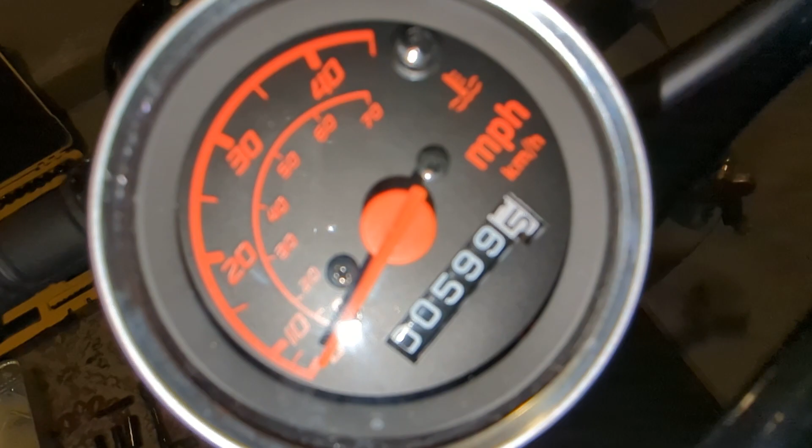I have hit almost 600 miles, it's 599.5. By the time I get ready to go to work tomorrow and come back, it will be well over 600. In case you guys aren't tracking, we have to do the very first service maintenance on these bikes at right around 600 miles.

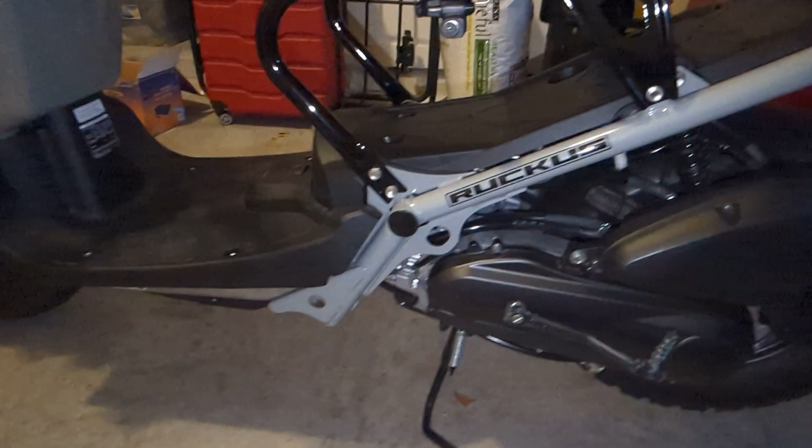After that, you have to do it every 2,500 miles. But I'm part of some Facebook groups for the Ruckus, and lately I saw a guy out there with a 22,000 mile Ruckus from like 2005, and he said what he did is an oil change every 1,000 miles. So that's something to keep in mind.

As of right now, I will do my 600-mile service real quick, and after that I might not wait until 2,500 miles. Maybe I'll just do 1,500 or something. But definitely something to keep in mind.

You know, it's a Honda. If you take care of it, it will last forever, and that's a for sure thing on these things.

So I know there's a 600-mile service. What do I do? Well, I check the manual, right? So that's the very first thing you guys will need to check. Check your manual. Some things we're gonna need today, real quick.

We're gonna need a half-inch ratchet, small extension if you want to. You might actually need it for the oil. I need a 17 socket, a 12, and a 10 mil.

As well, I did buy the genuine Honda oil. I didn't really have to. All you have to do is get a 4-stroke 10W30 oil for anything, but it's so cheap. I actually got a 2-pack from Amazon, it was really cheap, so I'm just gonna get the original, no big deal.

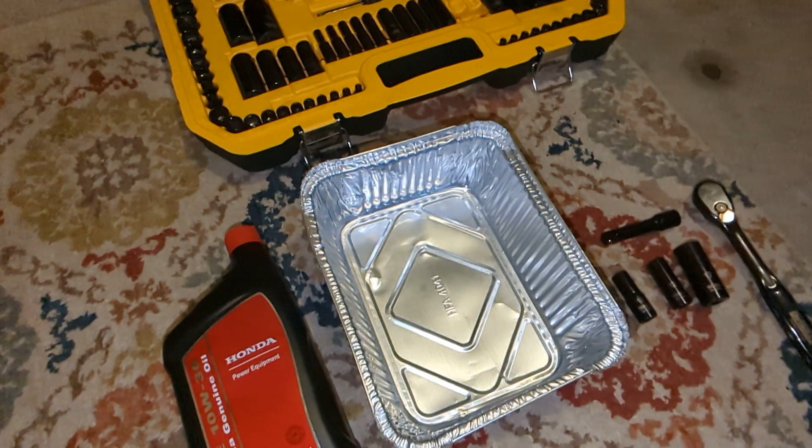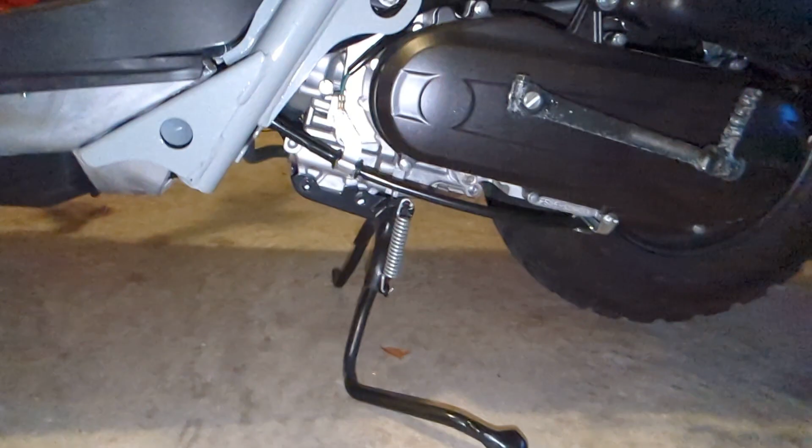As well, you need a small tray or anything you have—Tupperware will work too, to catch the oil. Matter of fact, I just did my Ridgeline oil change, and I didn't record it because I couldn't. But anyhow, I have this thing halfway full. I was trying to use this for this video, but it's too tall. So that's something to keep in mind whenever you do your oil change on the Ruckus. You definitely need something small because the opening is right here, and there's no room to put anything else. So a small tray of any sort will be awesome and easy.

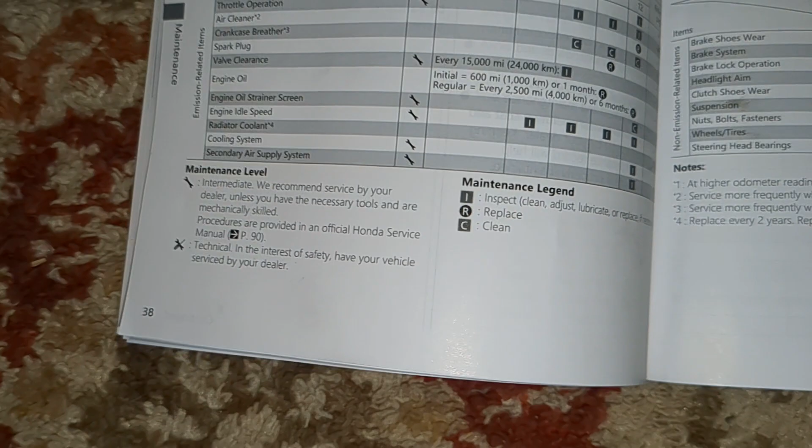So without further ado, let's get right to it. All right, so like I was telling you guys, all you need to do is check your manual, and at least in mine, on page 38, that's the service maintenance.

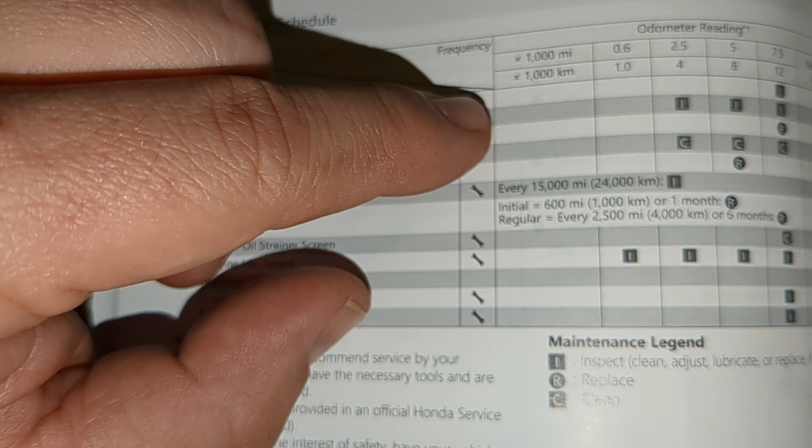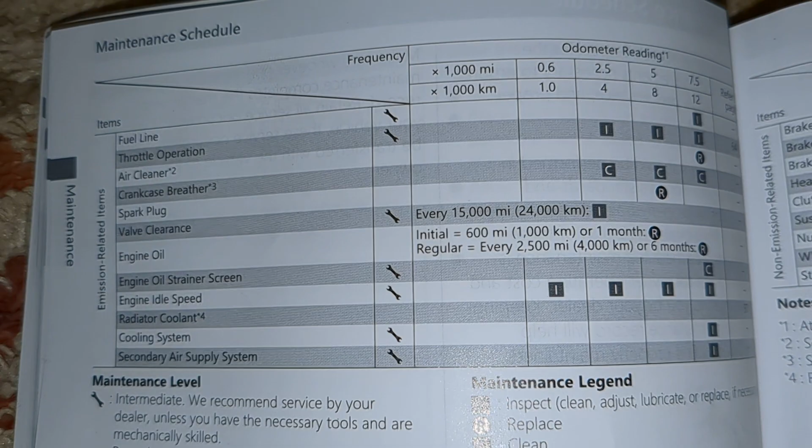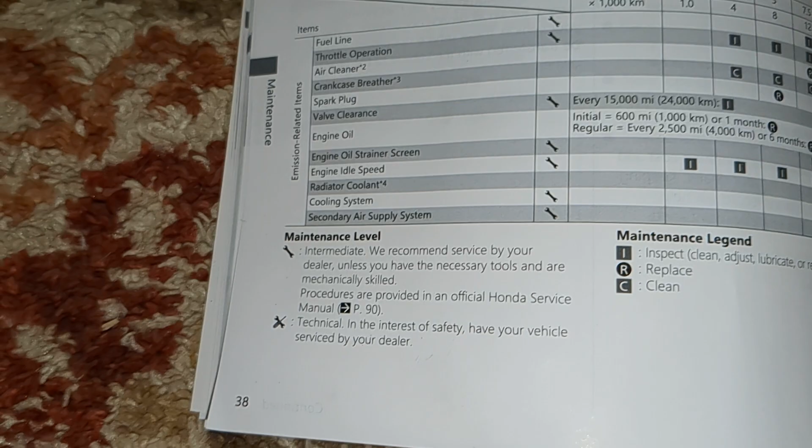So the way you read this is you have all your tasks right here, and the level of skill, maintenance level. Just keep in mind, Honda, just like anybody out there, is a company, so of course they're gonna say simple things like an oil change should be done by the dealership, and of course they want to charge for it. So I don't really pay too much attention to these levels of maintenance, because any dealership wants you to go there and pay.

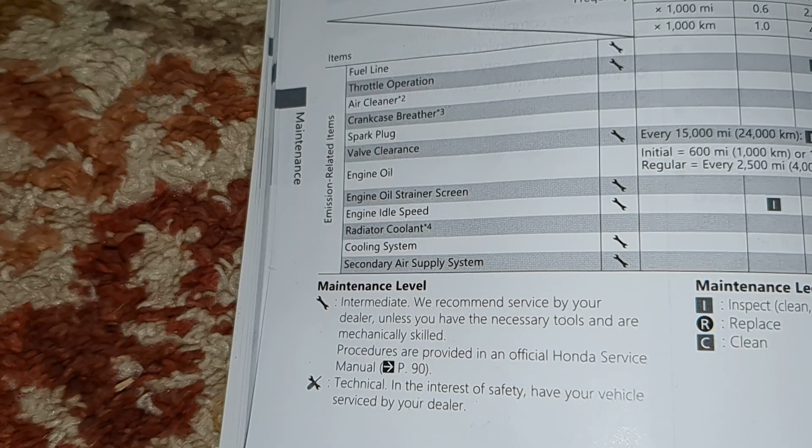For example, for the Ridgeline, instead of paying $160 for an oil change, you can do it yourself for like 50 or 60 bucks. But anyhow, that's neither here nor there.

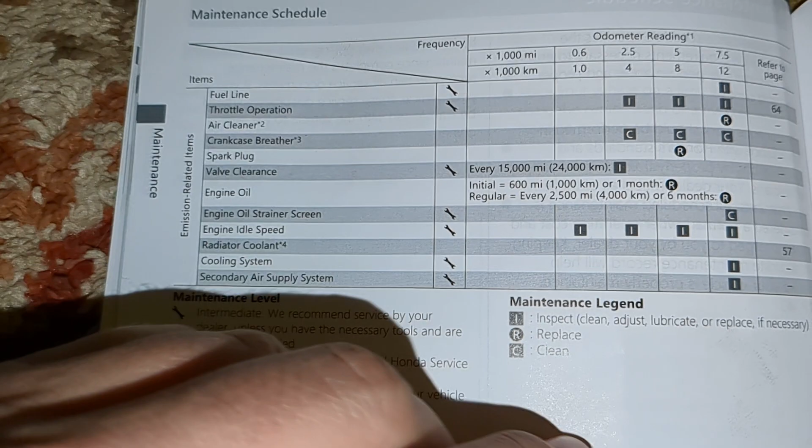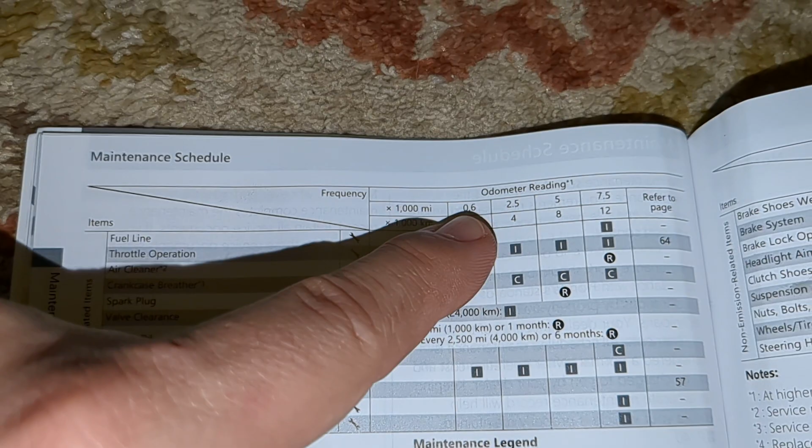All right, the way you read this is at the top you have what your odometer should be reading. So 0.6 times 1,000 miles means 600 miles. So that's the very first service that you need to do. That's what we're doing here today.

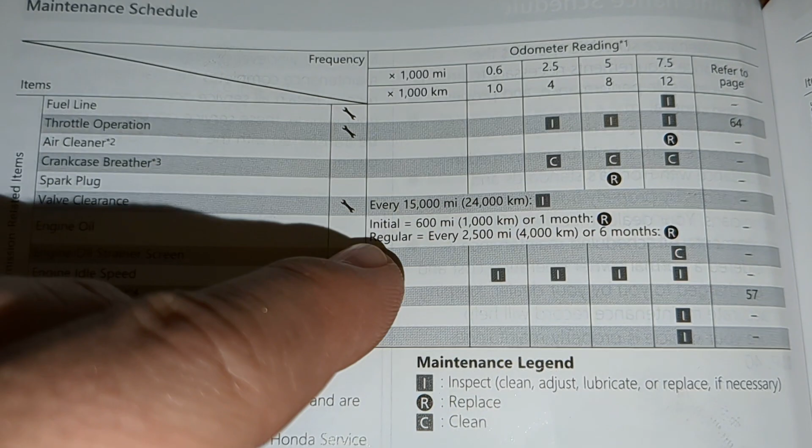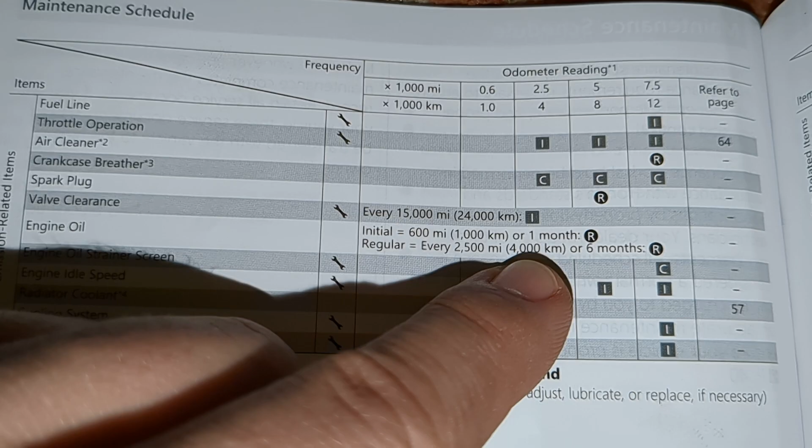And it says right here, initial 600 miles or 1 month, which I'll be honest with you, I did not respect the time. I just did my 600 miles. It took me from July, August, September, October—so it took me 3 months. Whoopsie, I guess I'll pay more attention to that.

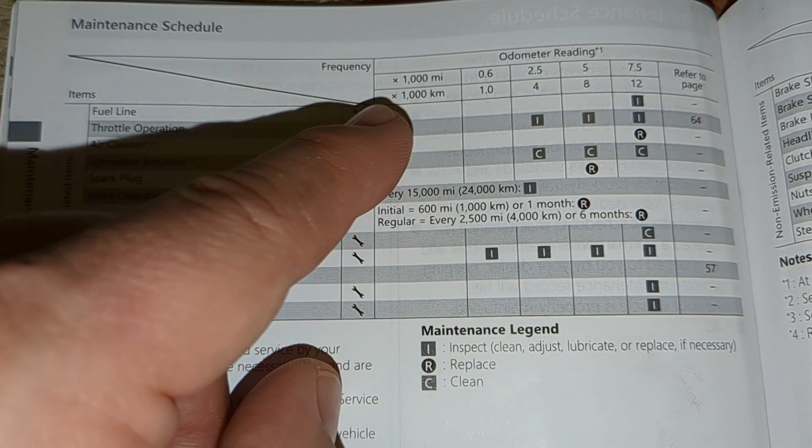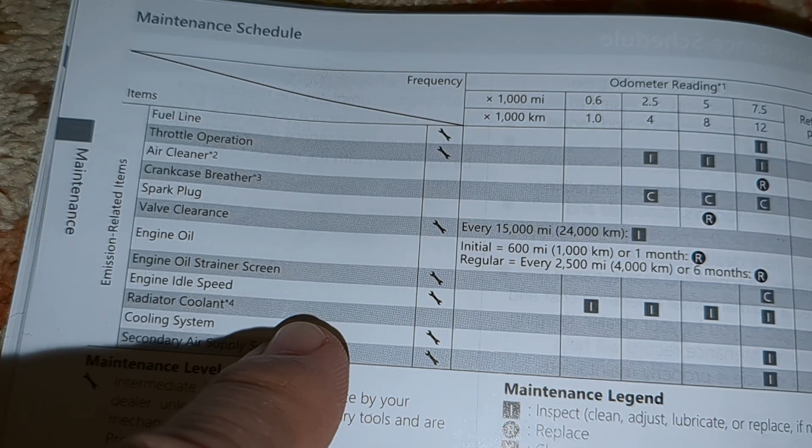But the way you read that now is under the category of 600 miles, you go down and you see, okay, so now I need to do idle, engine idle speed. Cool, so I have to do that.

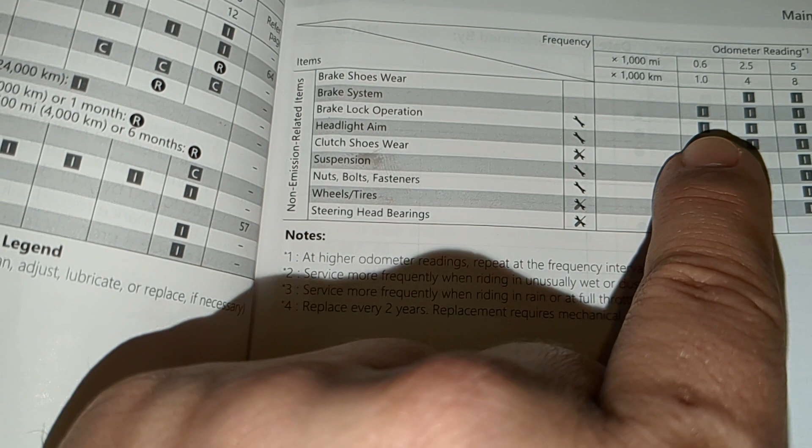Also move on to the second page and you keep going right here. All right, so I have the brake system, and right here I have the brake lock operation, and here I have the nuts and bolts, fastener, and steering.

And how do you know what that 'I' means? You go to the maintenance legend. Let me focus right here, and it's an inspection—you inspect, clean, adjust, lubricate as desired. Okay, this is very simple.

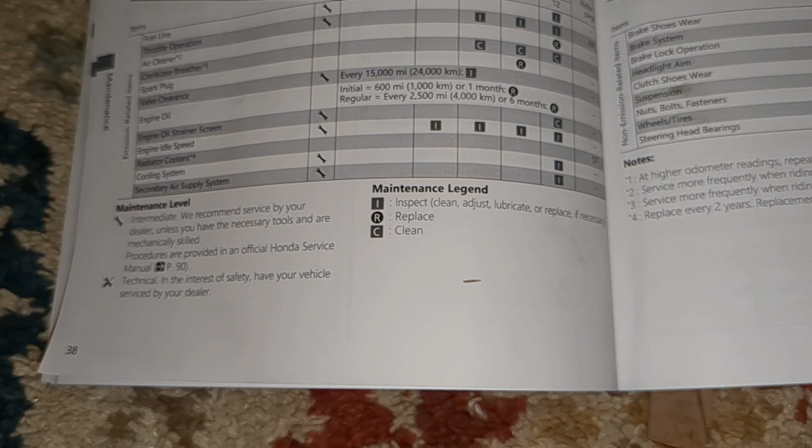The main thing that you really have to do with these bikes for the services is the engine oil, that's what you really care about. But let's go through it real quick, all right?

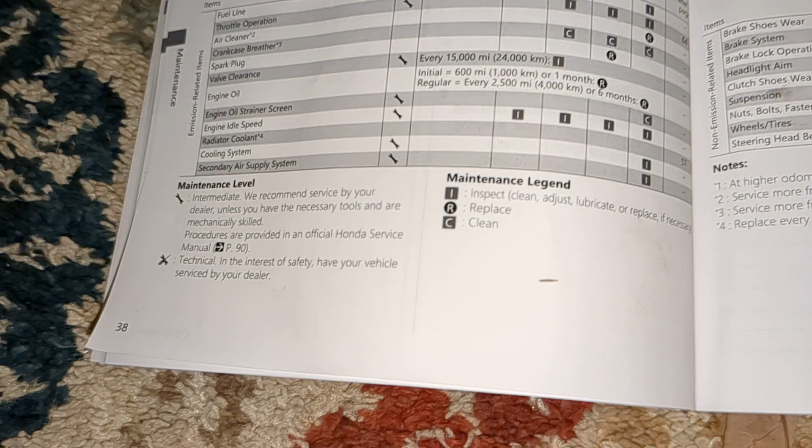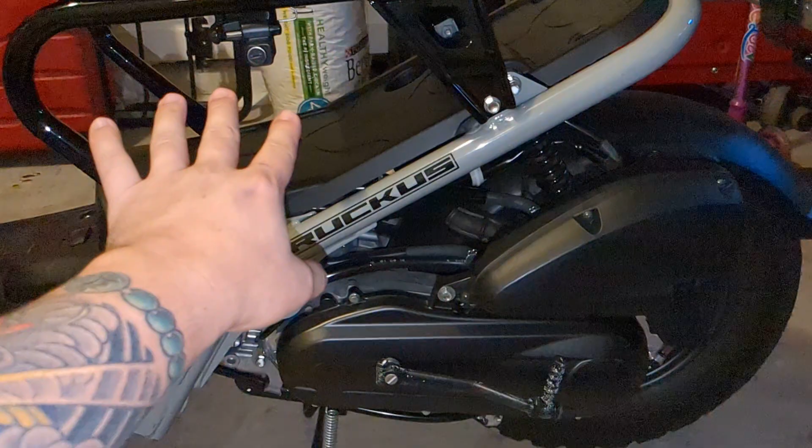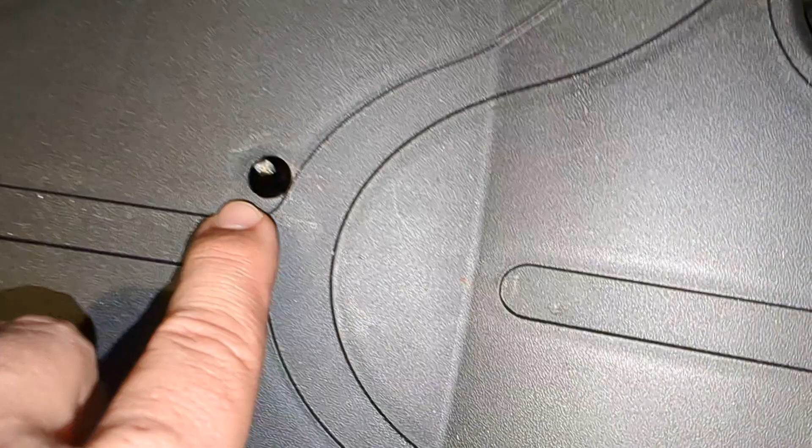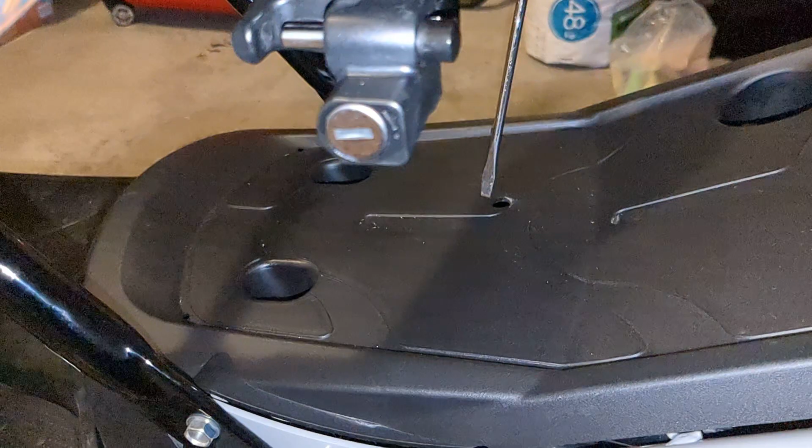For the engine idle speed, if you ever have issues with that, the way you do it is—matter of fact, I took off my bag because I need to show you—but the way you do it is you turn on the bike, and if you guys see this tiny hole right here, there is a screw down there. So you put your screwdriver down there, and as the bike is on, you can either go counterclockwise or the other way, left or right.

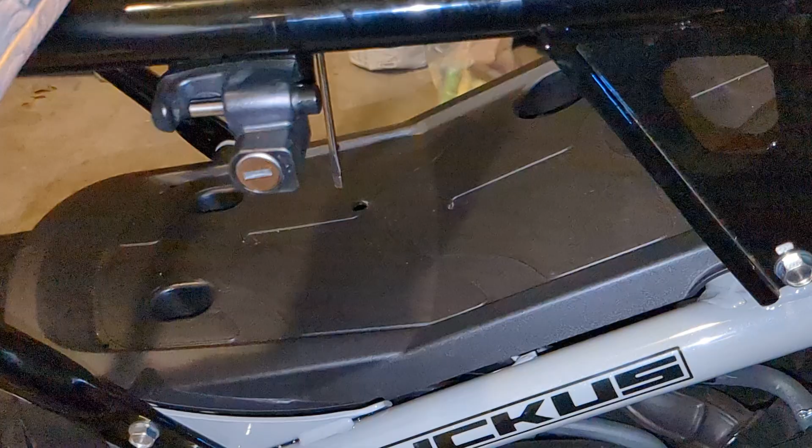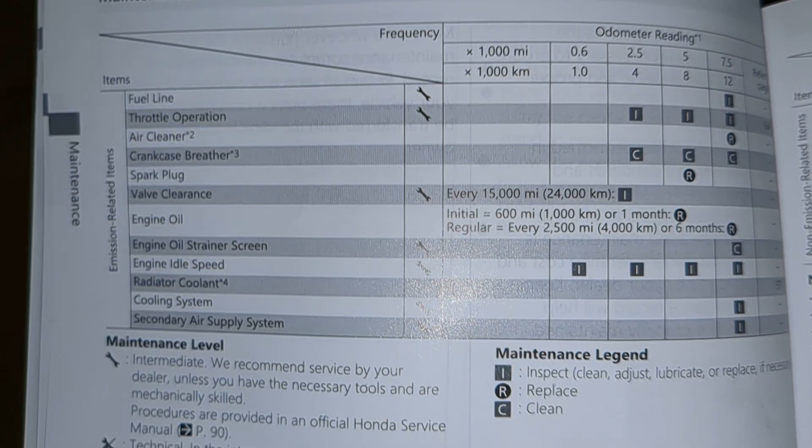If you go right, the bike will idle a little bit faster. If you go left, it's less. So if you ever feel like your bike is going to stall right before or when you're stopping, this is where you need to come. Just give it a little bit of adjustment to the right until it gets to the right specs or to your feel. I did that off camera already, not trying to be loud since it's getting dark, but that's done. That's the inspection, I did it.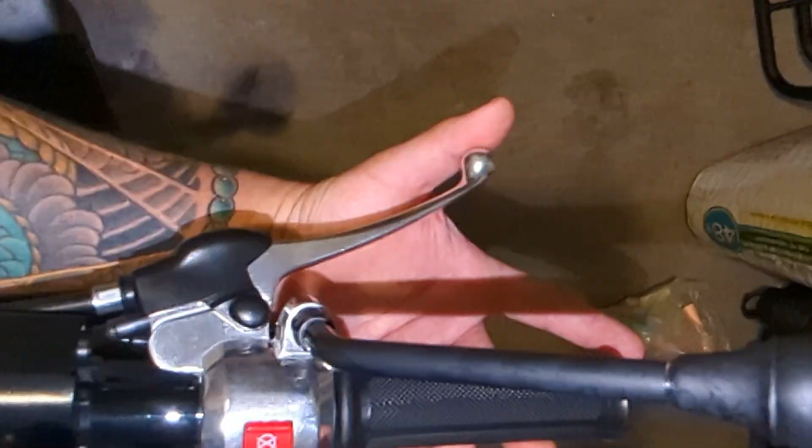The brake system is the next one, and it's also really simple. What you need to read in the manual is that you should double check this. This should be at 3/8 of the distance before it catches. So that's one, and you also do this one, 3/8 of travel before it catches between here and here. So it should catch right here. I already did that too.

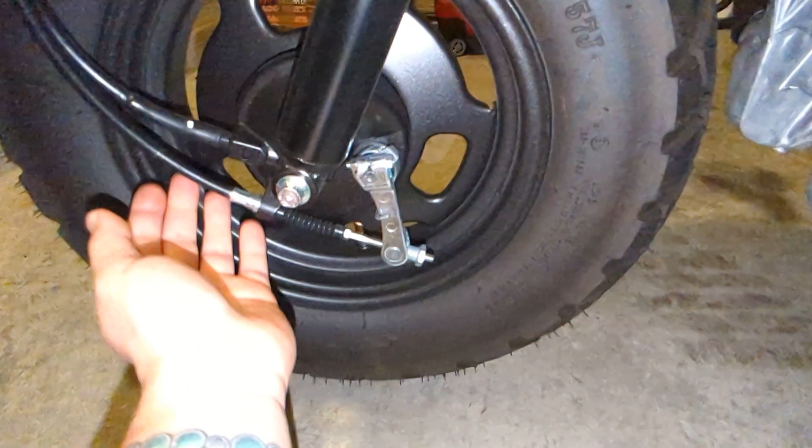Matter of fact, I did it right before this service because I felt like this was a little loose. So if you ever have that problem, all you have to do is go to the wheel, and these cables are basically the cables that go all the way to the brakes. If you go right, that's righty tighty, and if you go left, that's lefty loosey. If you give it one turn to the right, you're moving this lever that pulls the brake cable. It's the same exact principle as adjusting a bicycle. So if you feel like it's too loose, you go to the right.

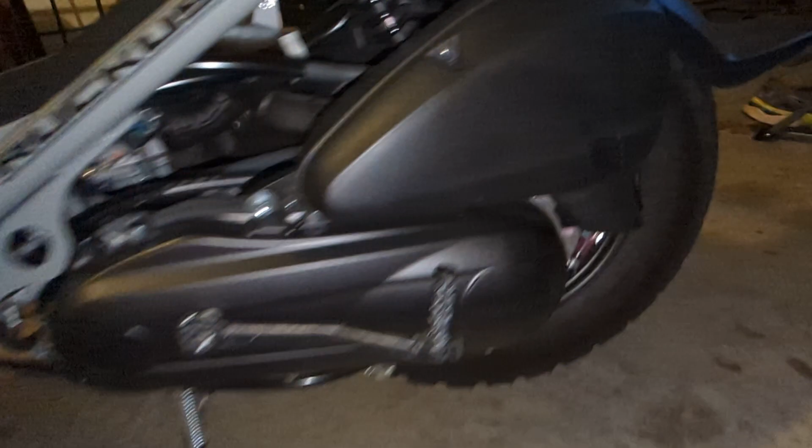If you feel like it's too tight, you loosen it up by going to the left. The back has the same system. So if you feel like the brake is too tight when braking, you go to the left, and if not, you go to the right. It's that simple. This thing is really easy, so I got that done.

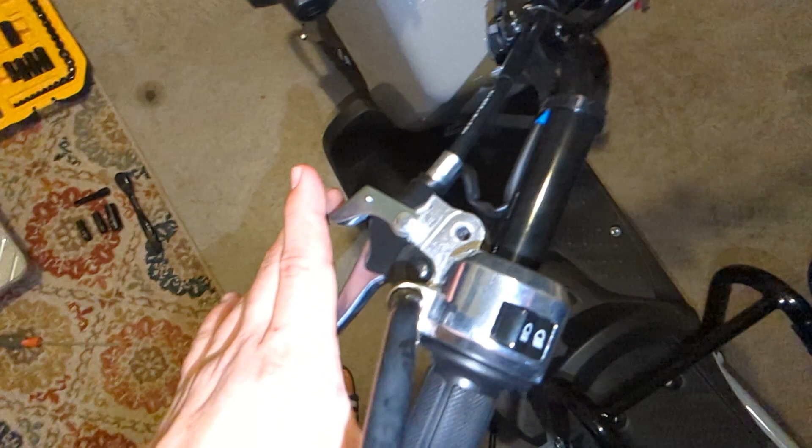The brake lock operation is nothing but this thing, which if I didn't show you in my initial video, you pull this and now it's engaged like a handbrake, like if you have it in your car. What you're doing is inspecting it to make sure it catches and the bike won't move. I've already done all that before, and that's good to go as well.

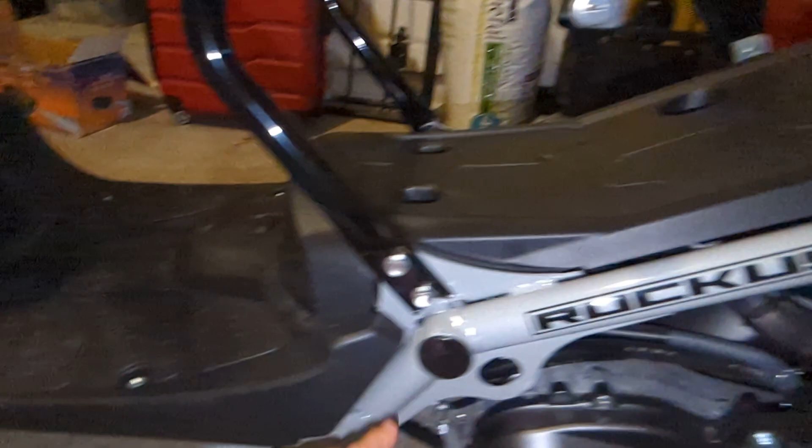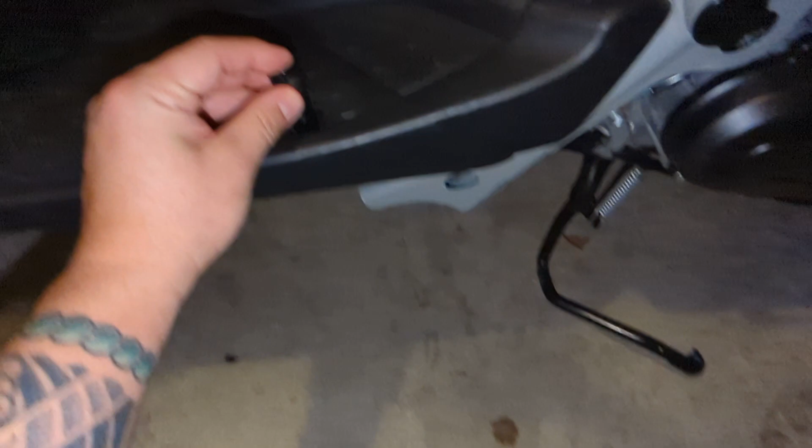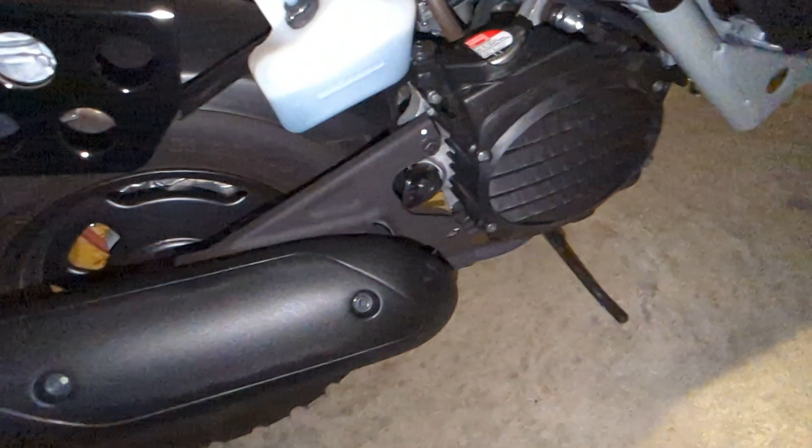Nuts and bolts is an inspection where you go around the whole bike checking bolts on the frame and anything around, since the bike is always vibrating as you go down the road. They want you to give it a couple turns if needed. With these little ones, you need a 10 mil, but for these medium-sized ones, they're like 12. So you go around the whole bike, check whatever nuts and bolts there are, and tighten them up. I'm not going to show you that during the video since it's a waste of time, but I got that done.

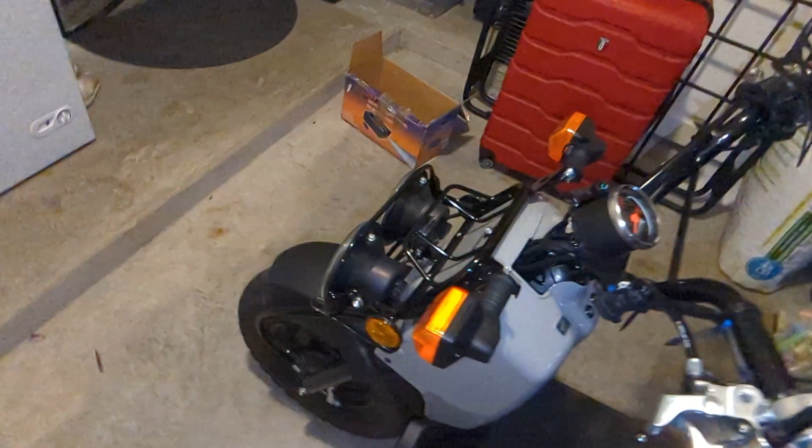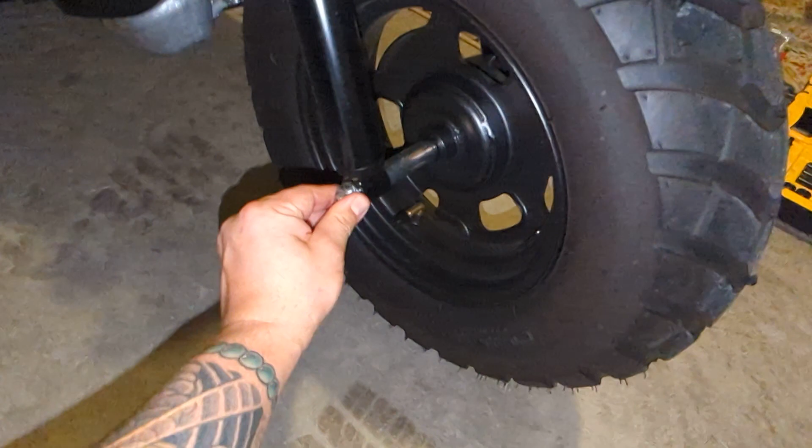For the steering head bearings, as far as my understanding goes, I actually had to watch a video for that, but basically you're looking that the steering is straight. You're visually checking that nothing is loose. This would be one of the most important bolts to tighten, because that is how your tire is attached. So that's it, as simple as that.

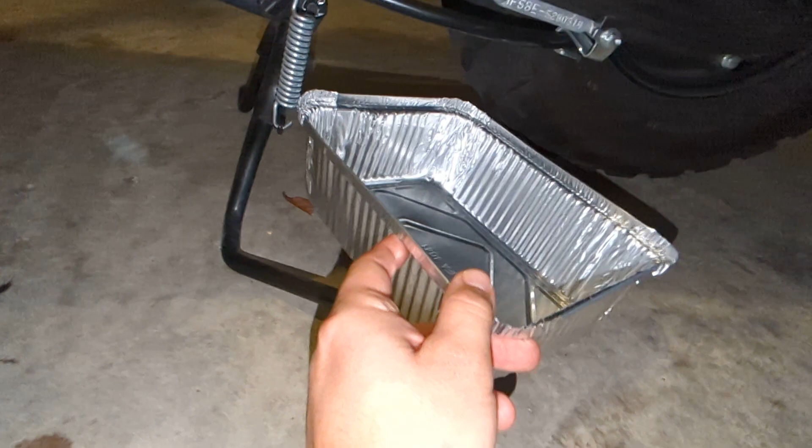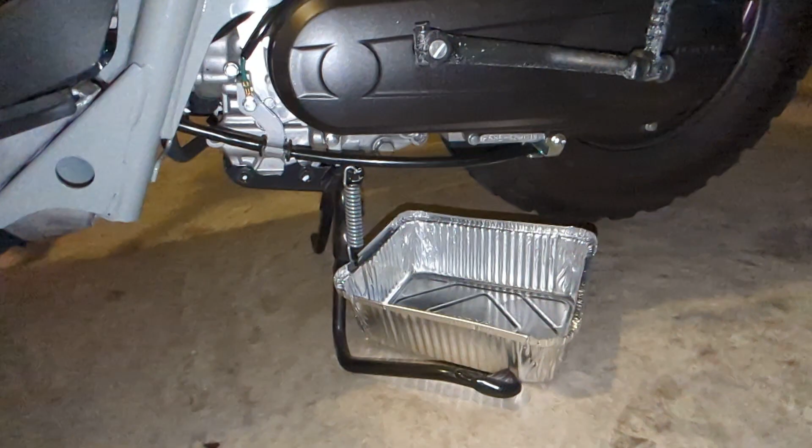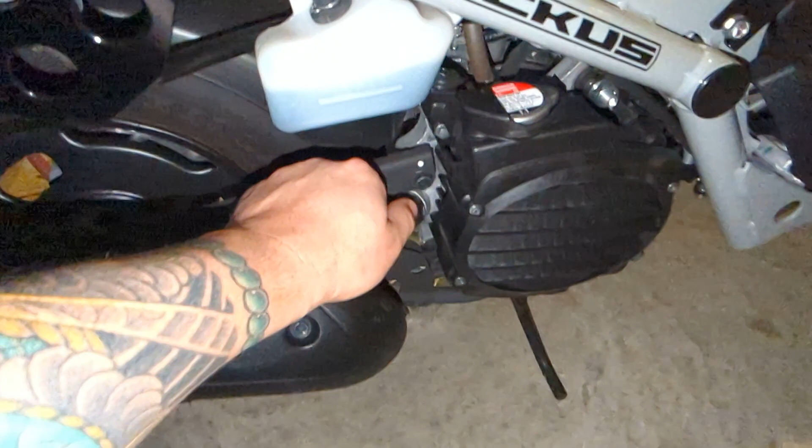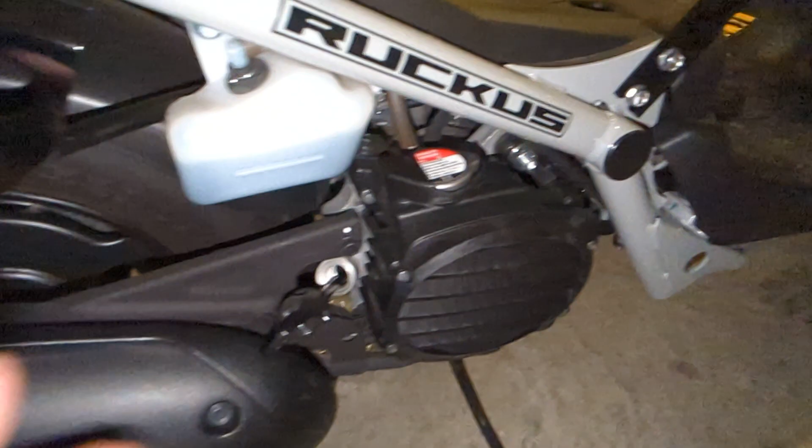The main thing we're looking at now is the oil change. The way you do the oil change this time is very simple. We have to get our tray under here, and this is our drain bolt, so we're going to undo that real quick. Before you do that, you want to take the dipstick and loosen it up. You don't have to take it out completely, but I'm basically giving air passage so the oil drains faster, that's all I'm doing. Let me put this on a tripod and I'll show you guys exactly how that goes.

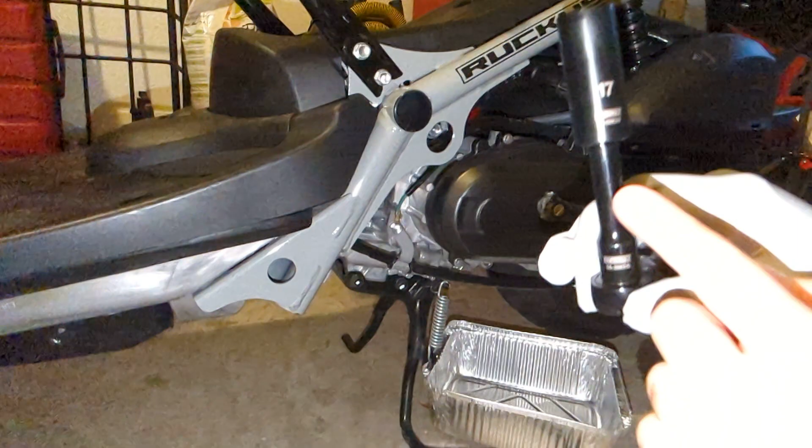So I'm ready to drain the oil. For this job, you will need a 17 mil socket with an extension and your ratchet. So you get it in here and do it. As you see, I'm using a glove, I don't like getting dirty. I do the same thing when I'm doing the ridgeline.

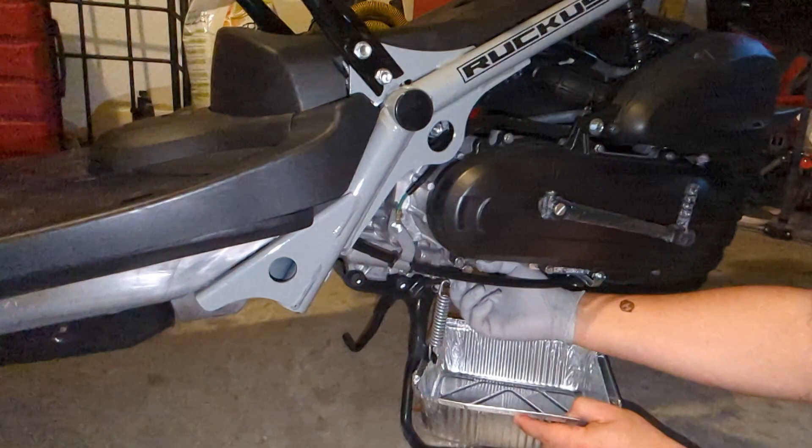At this point, you want to do this and be as quick as possible. There's gonna be a washer that is coming up, so grab the washer and boom, get that oil out of there. So you can see the washer. If you see any videos online, anybody will always tell you to replace the washer that it comes with because you're supposed to, but I never do unless something's wrong with it. After 20 years of doing oil changes, I have never really used a new one. So it is what it is.

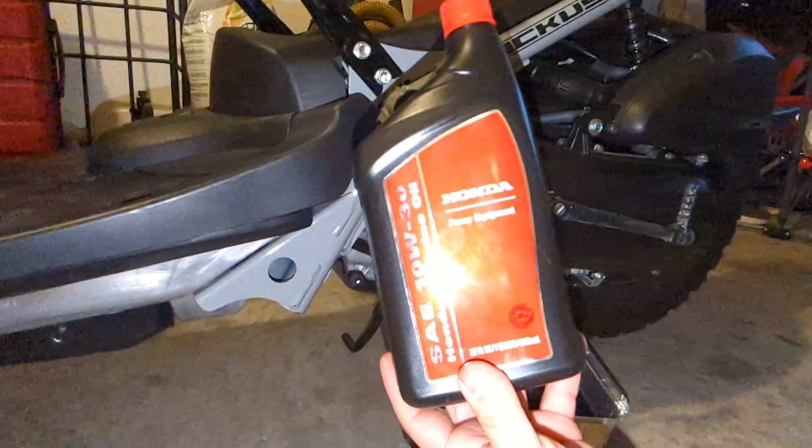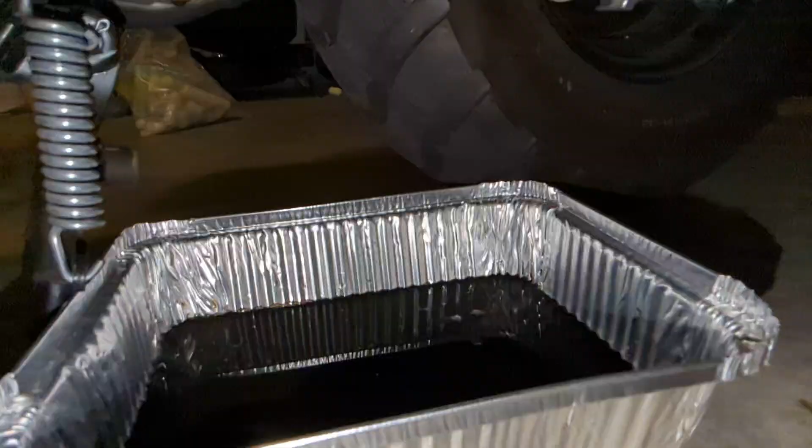As you can see, this drainage was pretty quick. What I'm doing right now is taking out 0.6 quarts of fluid, so I will just replace it with 0.6 out of that. Very simple, so let me pause that. I'm gonna let that finish draining, clean this up real quick, and we'll finish up this quick service. Just to give you a better look while it's draining, that is the draining hole. It's finishing up right now. I'm going to place this back as it was, washer and all.

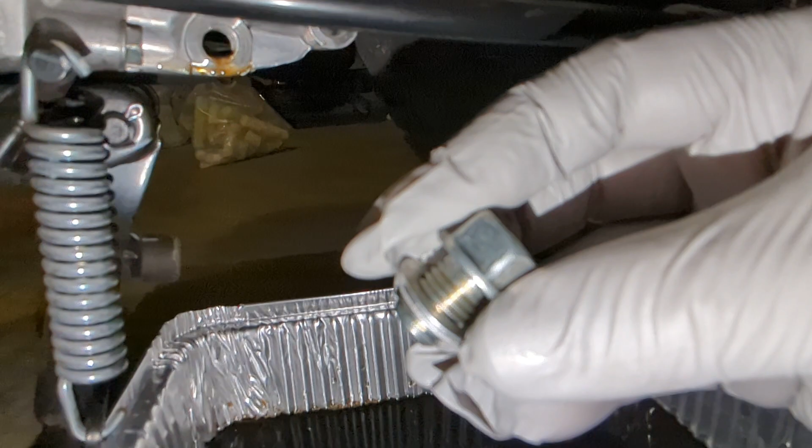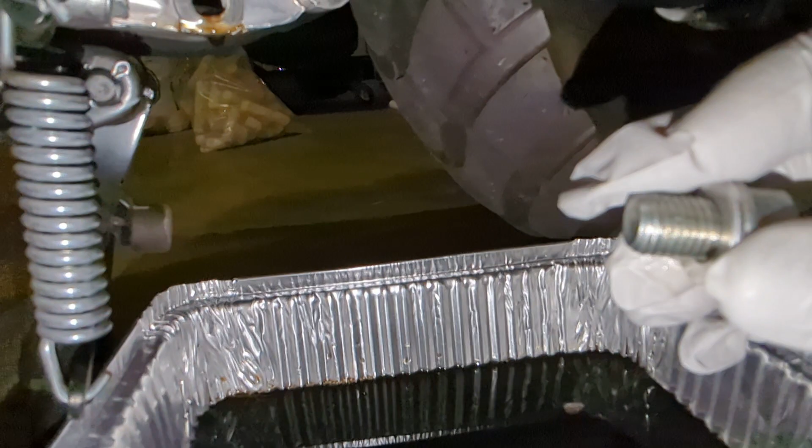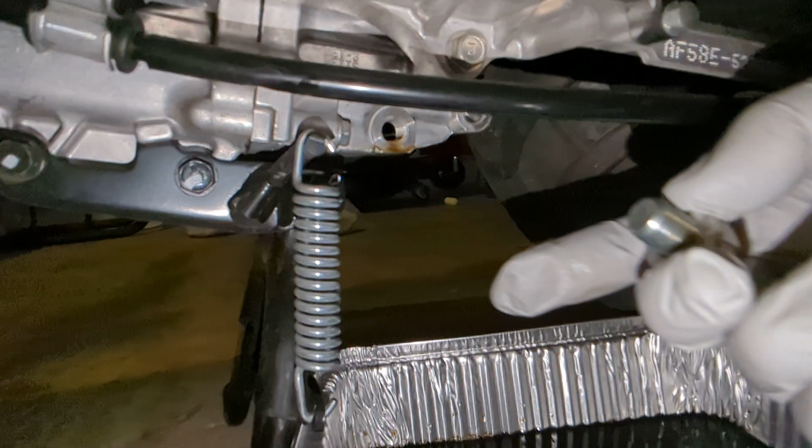As long as you don't go beast mode, you'll be all right. Just give it a nice tug, and that's about it. You can definitely use a torque wrench if you like to. I think it's 12 pounds, I believe, but anyway, I do not have one. I never bought one. Just keep in mind, it's an aluminum block like anything out there, so just give it a nice tug, don't overdo it, and you'll be all right. I'm gonna do that real quick, and then I'm gonna show you guys the rest.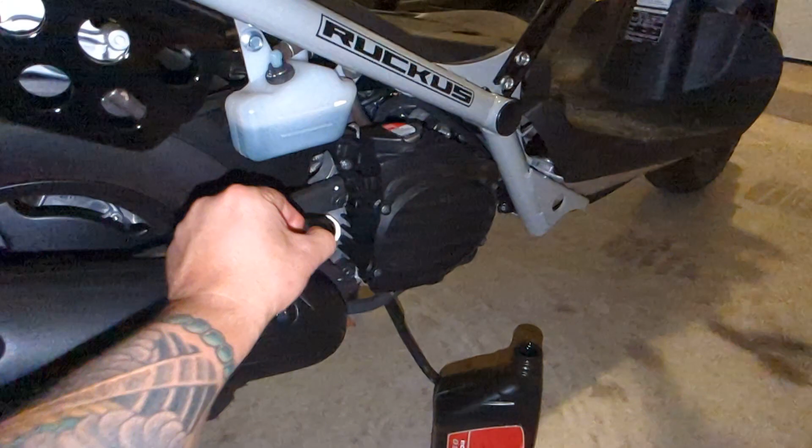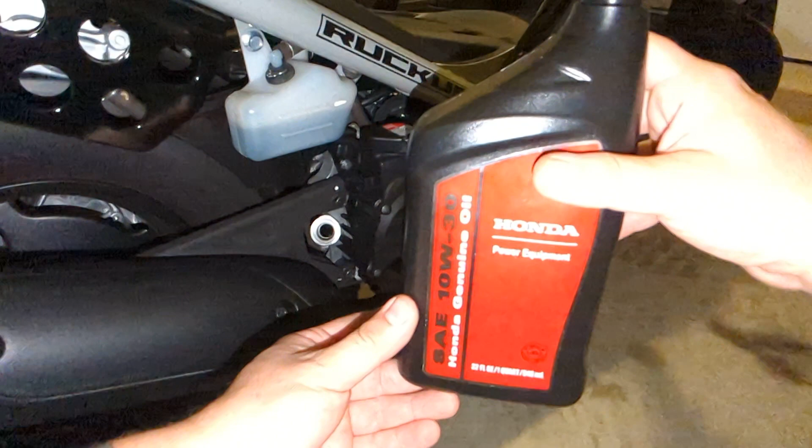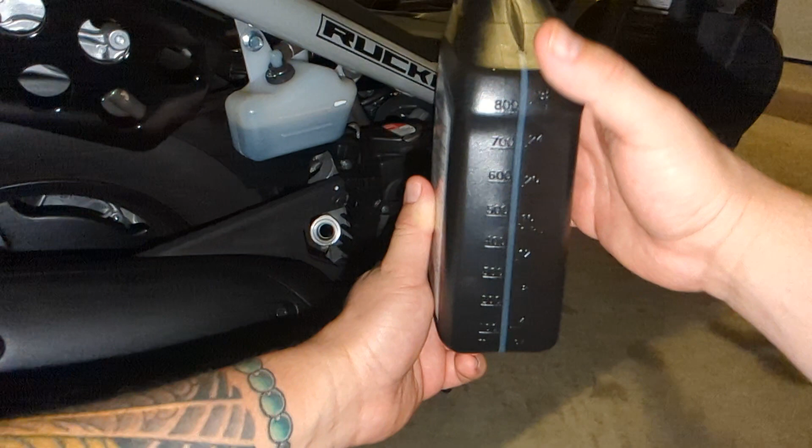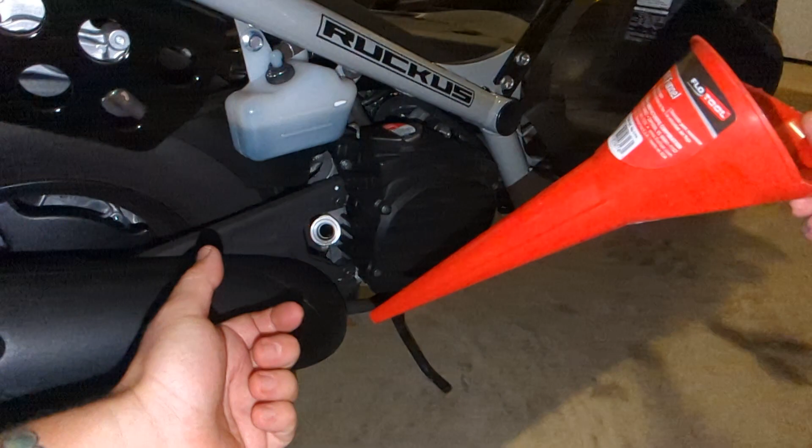Now I'm on the other side of the bike, and all I have to do is remove the dipstick, put it on the side. Like I was telling you, because we're not replacing everything else, there's a screen that you actually do on the next services, but because we're not doing that, what we're replacing is 0.6 quarts, which, as you know, each quart will have about 0.1, 0.2, 0.3, all the way to 1.0, which is 1 quart. So just a quick math is, if I'm putting in 0.6, that means in this bottle I'm wanting to have 0.4 left. So I'm putting all the way from 0.4 and up. What you're really gonna need for this job is a long funnel. I already have that because I do the Ridgeline oil changes, and that's very helpful.

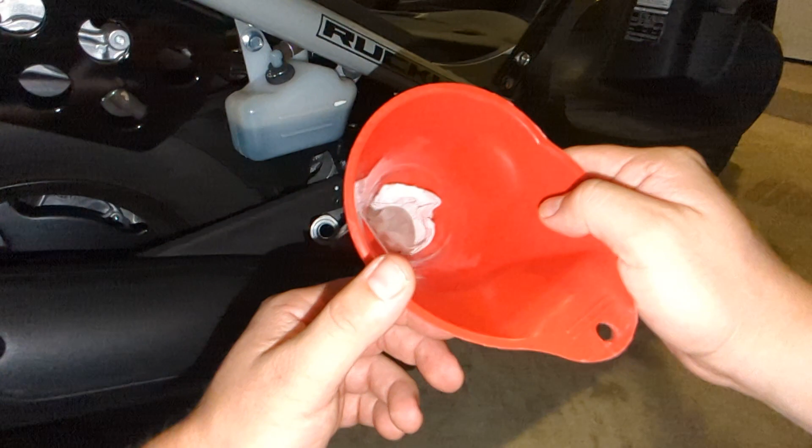What I'm gonna do is put it from my last service right in here, and little by little I'll be dumping the oil to make sure I get to 0.4 left in the bottle, which will be 0.6. Once we do that, we'll do the rest. I'm gonna do that off camera because there's no point for you guys to be looking at that for a couple minutes, and then we'll finish this up.

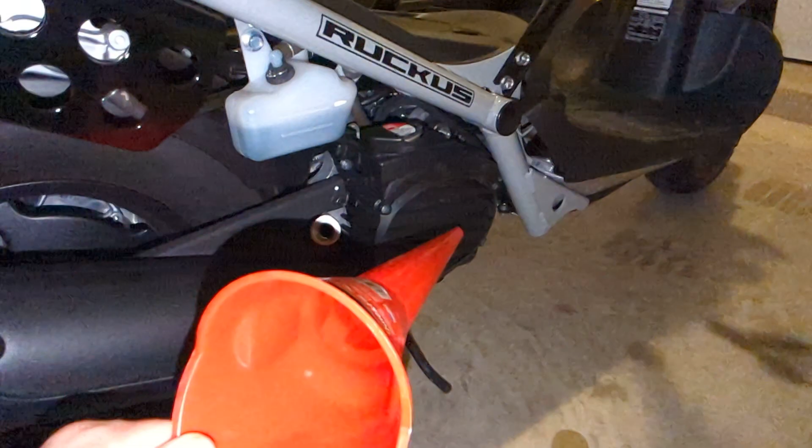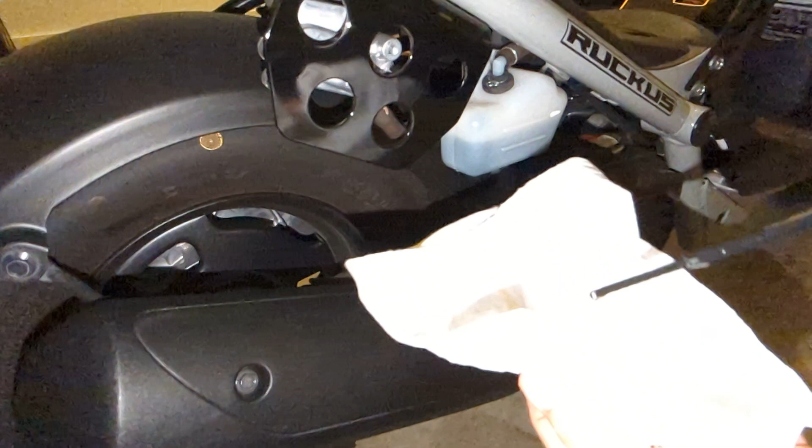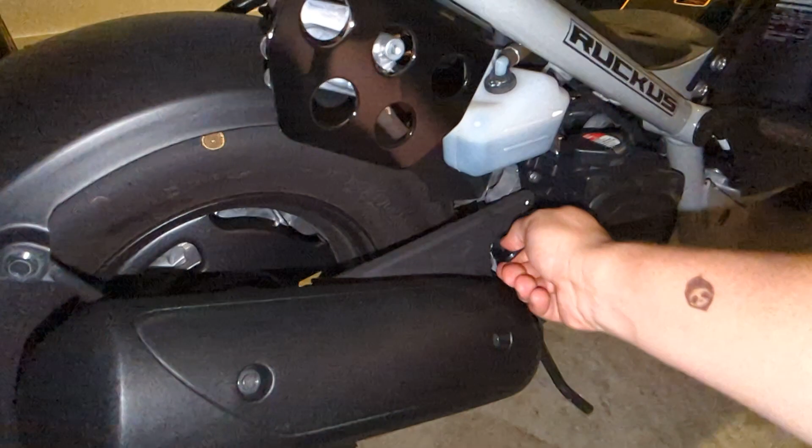Mission accomplished, 0.6 quarts of oil went in it. What we have left now is to grab your dipstick, wipe it clean real quick. Just a note, the bike is obviously on a level surface, but the way you check this oil per the manual, you put this in and you do not screw it. What you actually do is take it out now and check it. I don't know if you guys are gonna be able to tell, but I'm right there. Let me show you again. I don't know if the camera is gonna pick it up, but there, rested, nothing else. Boom, real quick. And the level, in case you can see it, is right here. It can be all the way up, all the way down, but it's right in the middle, so I am good with that verification. What I'm going to do is screw this to make sure I am good to go.

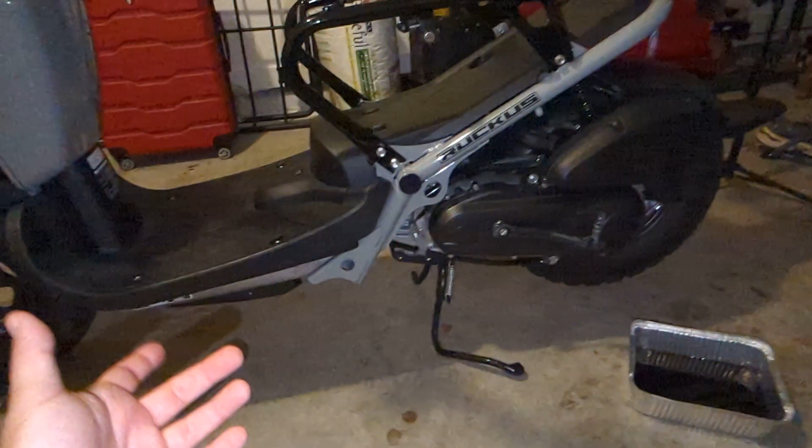A good practice will be, if you got anything dirty while you were working, make sure you clean all the surfaces. Clean any oil that you might have gotten on the bike or the floor, obviously. As you guys can see, this is the easiest service ever. It has taken me 18 minutes on the video simply because I'm explaining things and stopping, but honestly, if I wasn't recording, I could probably do this in 5 minutes or less.